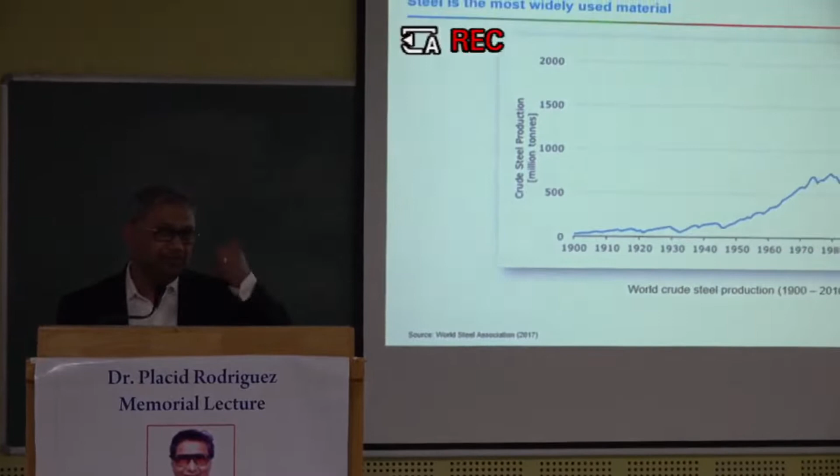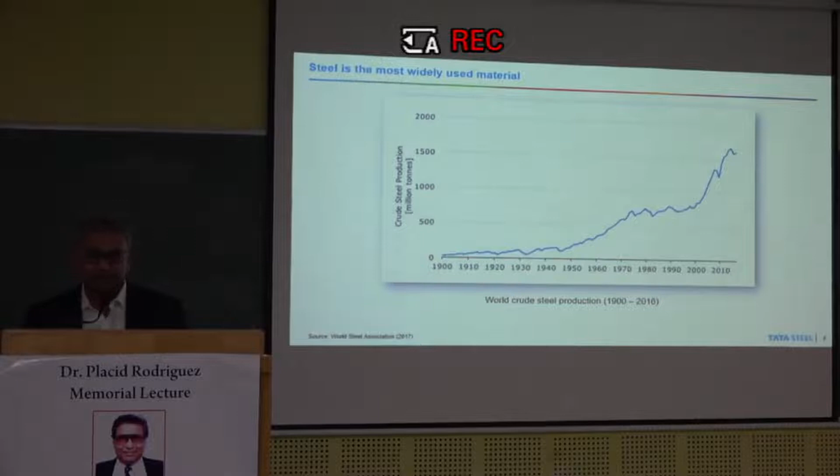Material-wise, steel is not going to go away. The world makes about 1.8 billion tons of steel, that's 1,800 million tons. Total value of that steel, roughly, is about $1 trillion, that's $1,000 billion. It's used in almost every aspect of life, from safety pin to the aircraft carrier. Everywhere there is steel - automotive is steel, the train is steel, the bridge is steel, the chair you're sitting on is made of steel tubes, so on and so forth. The nearest competitive material is aluminum. I'm not talking about concrete - yeah, concrete is more than steel, but I'm talking about metallic and non-metallic materials, not aggregates. The nearest competitive material is aluminum, and in terms of value, while steel is $1 trillion, aluminum is about $200 billion. So that's the gap, right?

The nearest competitor coming up very fast is polymeric and polymeric-based structural materials, which are fiber-reinforced polymer composites. This could be glass fiber reinforced, carbon fiber reinforced, aramid, basalt, or even natural fiber reinforced. But 65% is glass fiber reinforced around the world, and that's about $100 billion. So you have $1 trillion steel, about $200 billion aluminum, and about $100 billion for the nearest competitor, FRP composites. Titanium's global market is about $15-20 billion. So that's the scale we are talking about.

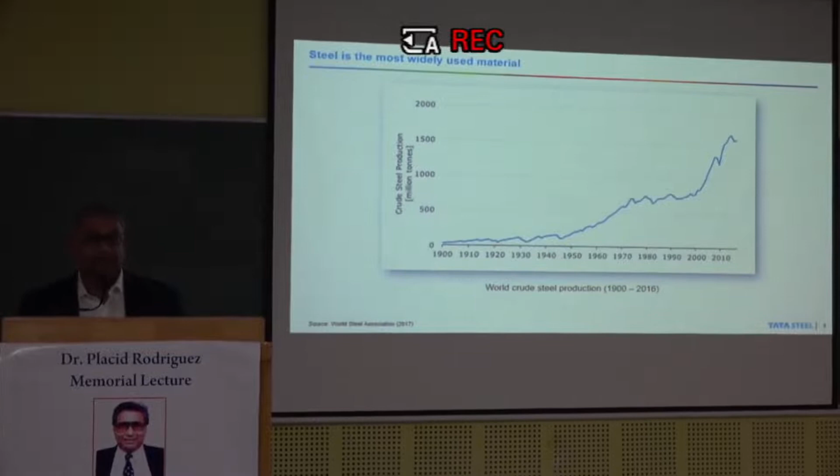None of these materials is actually going to be a threat to the volume and expanse of steel. It's increasing, and it's going to increase as countries expand in their infrastructure. India is a country which is massively increasing its infrastructure. India today produces the second highest tonnage of steel in the world. China produces 600, 700 million tons.

India produces and consumes about 110 million tons of steel, and it is number 2. But if you look at how much India can consume, given by global standard of a mature country, consumes about 250 kilograms per person per year of steel, which for a 1.4 billion, 1.3 billion population, it comes out to about 350 million tons. So India eventually is going to go to 350 million tons. Whether it is going to be 2030, 2040, that's a matter of debate, question, and how future unfolds. But that's the amount of steel eventually, as a mature country, India would need continuously.

Today, India is at 110. It's going to go to 300 eventually. It's going to pass through 200, 250. Those are large numbers. So whatever steel India produces today is going to double, is going to triple.

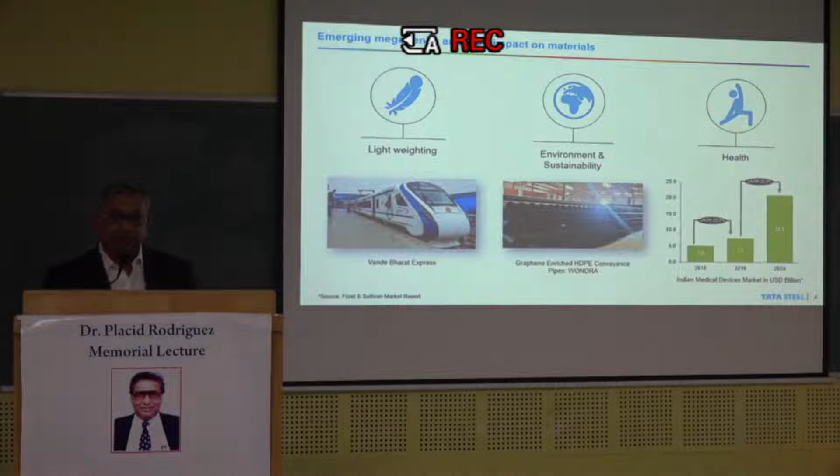And this is usually driven by megatrends. There are many trends that are happening in the world which define the way we behave, define the way industry behaves, and define the way the politicians bring in regulations. And these are megatrends such as lightweighting. The world needs lightweighting because weight means more energy consumption, and if you're consuming oil, you're also giving out more CO2. So the world is going to go towards lower weight, lightweighting, and it's going to always try to use lighter materials.

And those of you who know steel, they know that the move of steel towards higher and higher strengths and higher ductility is driven by the fact that you need to use lighter weight steels in a car, right? But then eventually, when it comes to cost effectiveness, some other lighter material will come in and win the competition. Plastics and fiber reinforced composites are 1/3 the density of steel. At some point, they will win on the lightweighting game. And therefore, bumpers today are FRP or plastic.

Environment and sustainability. It's a one-way street. The world, in spite of Germany suddenly liking coal because Russia has switched off the gas lines, is a temporary affair. The world will go towards low carbon energies. The world will go towards low CO2 emission. And that is a mega trend which will drive many, many behaviors and many, many transitions in the industry.

And you're already seeing battery-powered vehicles, electric vehicles on the roads. It's a one-way street for vehicles, which is to go towards electric vehicles. Of course, the electric vehicles need the batteries to be charged, and that battery is charged today by electricity which is generated by a coal-based power plant. So there is CO2 at some point in the power. But nevertheless, in 5, 10, 15 years' time, that power is also going to be green, and eventually you will have green electric vehicles on the road. That is the mega trend going forward.

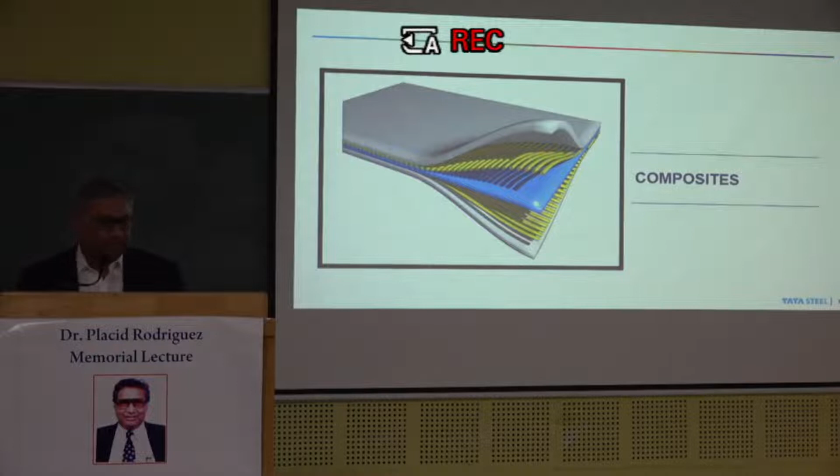But then the competition is based on multiple factors. It's based on whether lightweightedness is important, or superior strength to weight ratio is important, whether chemical and corrosion resistance is important, and whether it's important to mold the material into complicated shapes very easily. And of course, the underlying factor is cost, right? And all that happening at the right cost.

Worldwide, the growth rate of composites, given all these factors, is in double figures. In India, the worldwide market, as I've said, is about $100 billion. India is small. Like in any material, to start with, India remains small. Even today in steel, India is second in the world in volume. It is 100 million tons out of 1,800 million tons, so fraction-wise, it is small. So not surprising that in these new materials, India is small as a percentage of the world. So out of the $100 billion market in the world, the composites market in India is roughly 1.5 to $2 billion, so 1%, 2% of the world.

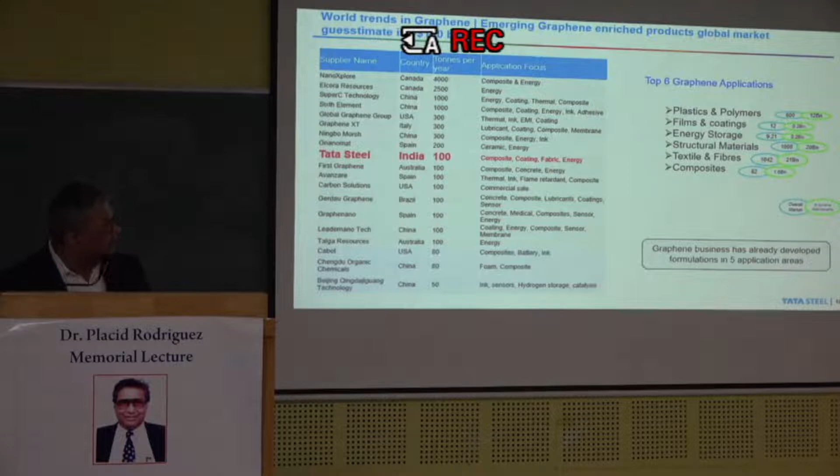Today, in terms of pure graphene production, Tata Steel is among the top 10 in the world. We have a 100 tons per annum graphene production plant in Jamshedpur, using 2 of our technologies, which I can talk about later in more detail if you want. We are looking at application of these graphenes in polymers, coatings, energy storage, textile, and composites.

So we have this plant in Jamshedpur with a capacity of 100 tons per annum, called Graphene—a very obvious name. Today we use graphene, and we have about 50 patents around graphene and its applications.

We use graphene in dispersions in paints, adhesives, and waterproofing. We use graphene in thermoplastics, and we have a range of thermoplastic pipes under the brand Wondra, whose properties are enhanced through graphene—the pressure they can take, and importantly, increased strength level. When you recycle this, normally strength drops, but because of the increased strength level, it can take 3 to 4 recyclings before strength drops below the acceptable limit. So graphene in thermoplastic pipes makes thermoplastic pipes recyclable.

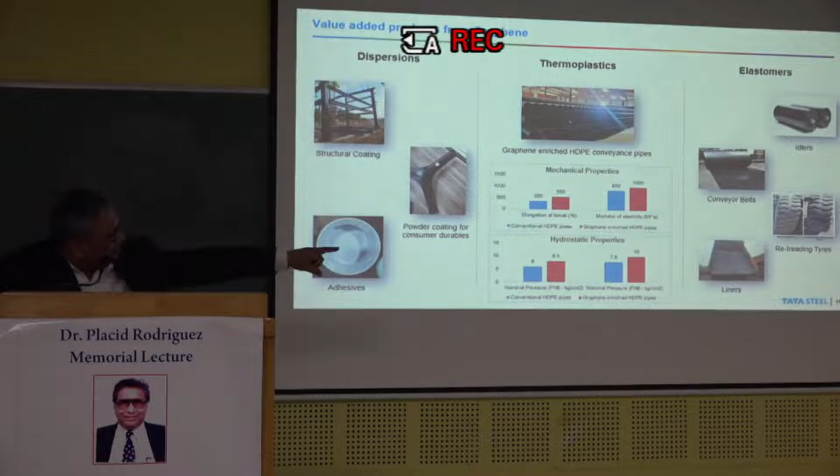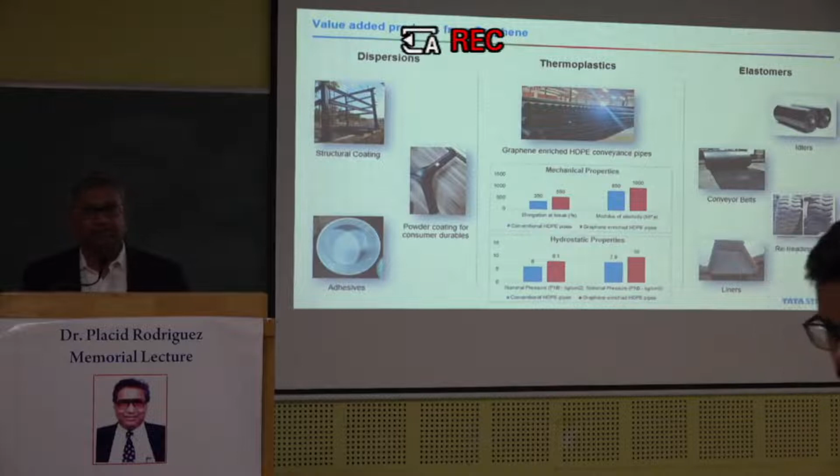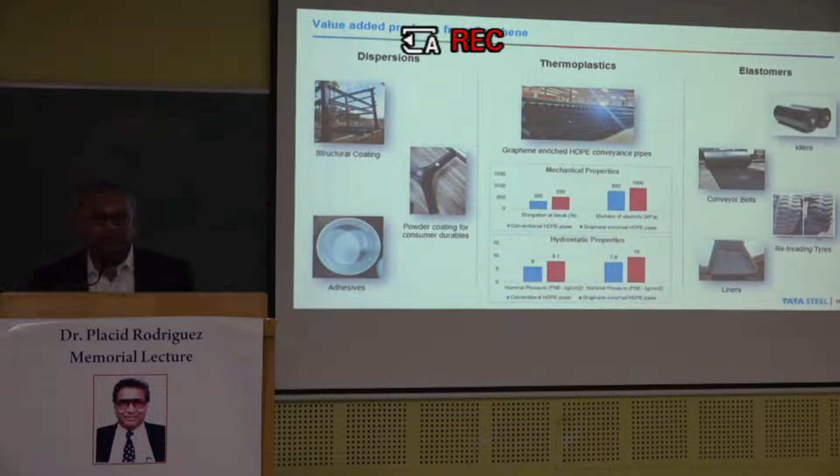Graphene-enriched HDPE conveyance pipes, and you can see the retreaded tires and the liners—this is a liner for a dumper truck. The dumper truck body is steel, and if left as steel, it wears off fast because rocks or iron ore fall on it. But if you put a rubber lining with graphene in it, wear resistance goes up. Instead of changing the main steel body, after a couple of years you only need to change the rubber liner. Without graphene, the rubber liner doesn't last, but with graphene it lasts. So maintenance time comes down, cost comes down, and availability and productivity go up.

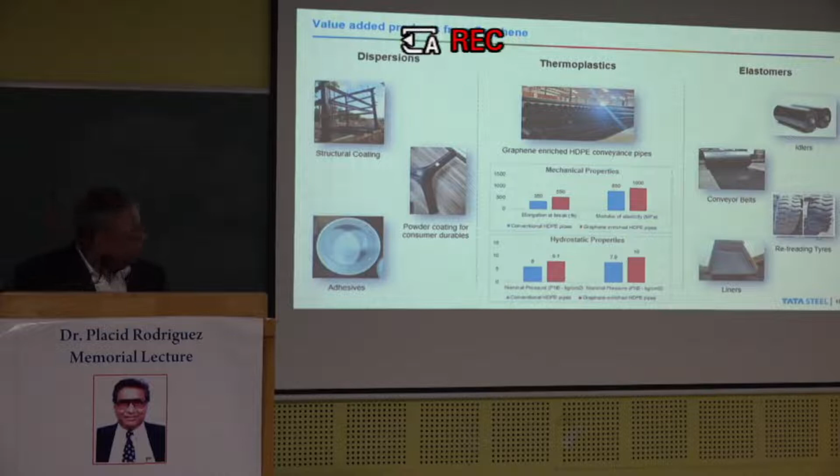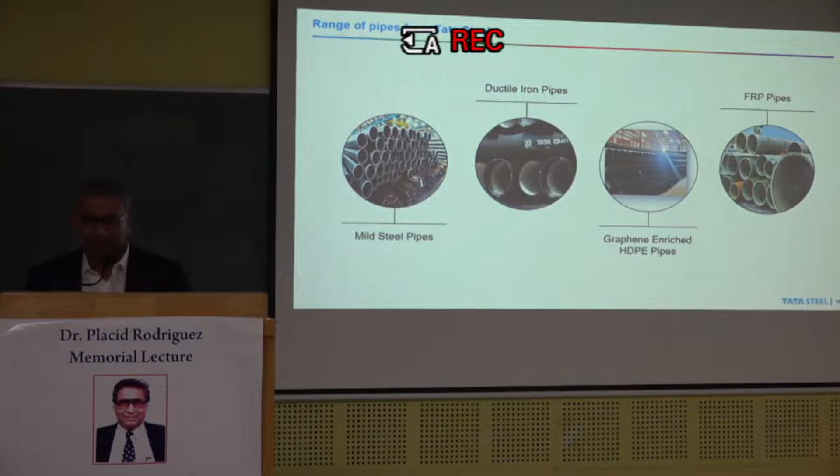Before coming to medical materials, we are one of the top 10 in volume capacity of graphene production. Our graphene business is 75 crores per month, putting us in the top 2 in the world in commercial use of graphene. This puts India right at the top in graphene production and usage, a material that around the world people find very difficult to use. Our graphene commercial usage is on an upward tick, doubling every 6 months.

Looking at the mega trends, we addressed lightweight materials and composites, and we're looking at large evolving sectors such as railways, including railway wagons. Wagons that carry salt and coal actually carry acid, hydrochloric or sulfuric, and they corrode very fast. By specification, these wagons should be made of austenitic stainless steel, but that's expensive, not easily available, and not very easily maintainable. So we've given a solution of using FRP for these wagons. We are working with RDSO, the Research Designs and Standards Organisation, with the permission of the minister, on 2 rakes, that's 120 wagons of FRP material as a prototype for transporting salt and coal.

Going by the megatrends, I mentioned health. As a materials company interested in materials beyond steel, we could not ignore health, so we delved into medical materials. Of course, medical materials is a huge area. Roughly, you could consider medical materials and devices into 4 segments: diagnostic imaging, like X-rays and CT scanners and the materials involved; instruments and appliances, mostly stainless steel; patient aids and implants, which are metallic as well as ceramic; and consumables and others, which are again ceramics and also some textile, bandages, protein supplements and things like that.

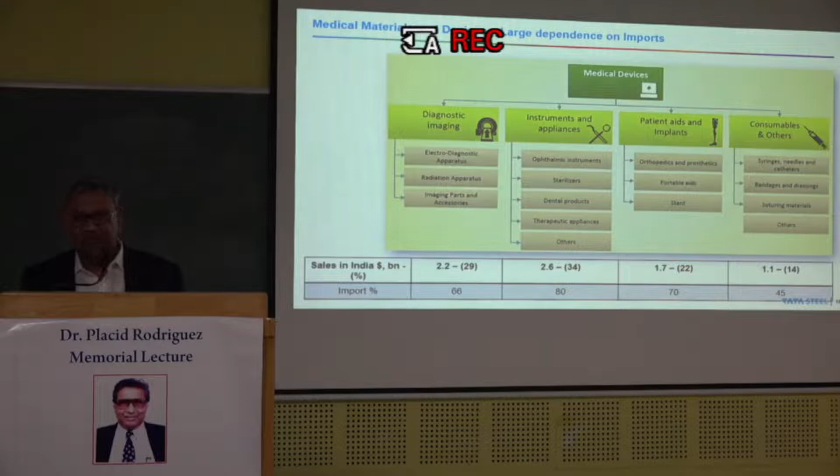So we decided to make a difference. We decided that we will not import even the technology for hydroxyapatite. We decided to work with IISc Bangalore, Professor Bikramjit Basu, one of the leading biomaterials professors, with Ramaiah Medical College in Bangalore, and with a startup company proficient in advanced ceramics manufacturing. We are steel makers; we understand ceramics, but we're not advanced ceramics manufacturers. So we created a company called Ceramat, a Tata Steel company, run by advanced ceramics experts. We are producing at commercial scale hydroxyapatite made using technology from IISc Bangalore. Its quality is the best in the world. We have benchmarked it in India with imported products, and sent our products to Belgium and the US for benchmarking, and it matches perfectly.

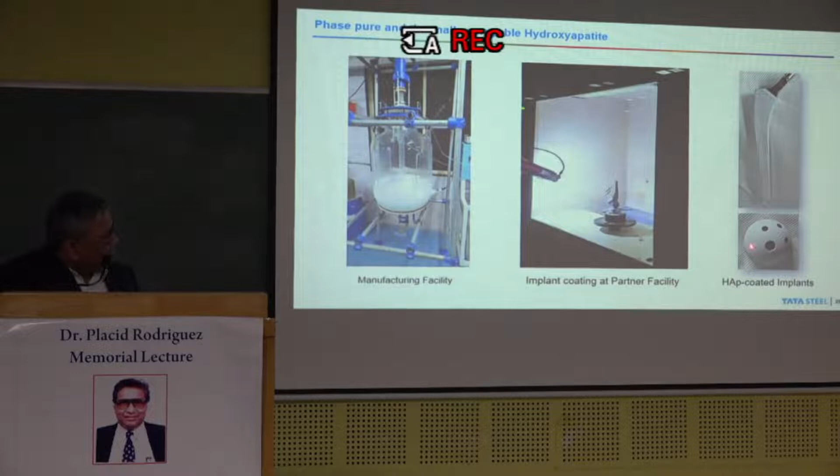Of course, it's gone through a lot of pain and hardship in evolving not only the process but also the equipment necessary to produce at that quality. But today we are ready to market, and it is being test marketed as hydroxyapatite for coating on implants. This is hydroxyapatite being produced in all glass vessels. We make about 200 kilograms per month, and we have the capacity. Here the hydroxyapatite is being plasma sprayed on a hip implant. This is what the implant otherwise looks like, and this is hydroxyapatite coated; it will also be coated on the socket, etc. This is our first use of hydroxyapatite, and the use of hydroxyapatite is multifold. We are 6 months into this business and will grow it rapidly as we go forward. This is an example of where India needs an Indian player to come in with our own technology to claim what is ours, since most foreign multinationals play in our market with prices that they control.

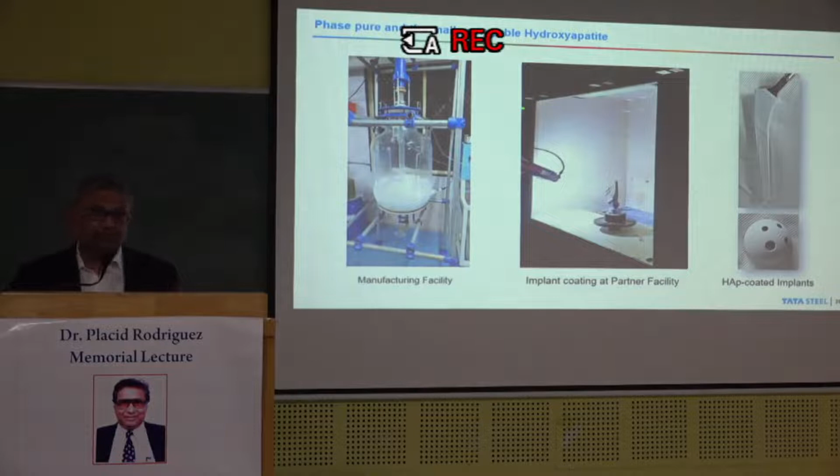So this is a bone replacement. We thought, why limit ourselves to a bone replacement? Oh sorry, there's a video of the plasma coating here.

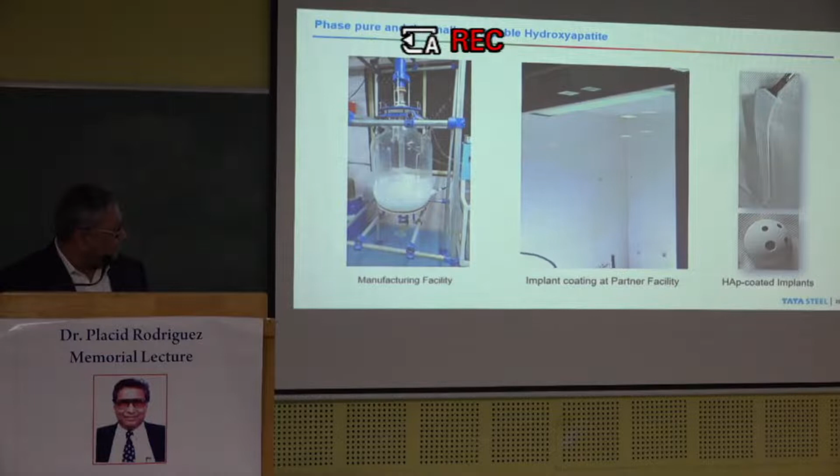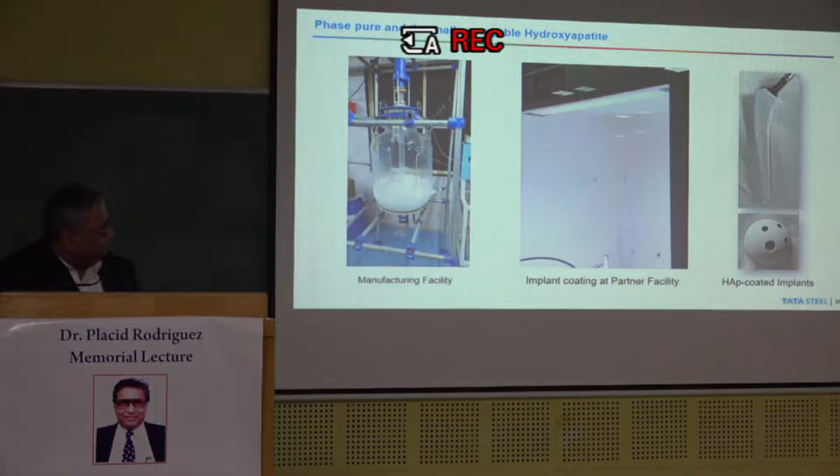Not very well photographed, but I guess you get the point. There's a spray gun, and the implant is rotating for the coating. Can I move on? Yeah.

So we looked at the other material to work simultaneously on. That was a bone replacement, and this is a skin replacement, or even a flesh replacement. So this is a protein called collagen. Collagen usually comes from cow bone or pig bone, which is not very user-friendly in a country like ours.

So the technology that we are working with, along with the startup that came out of IIT Kharagpur, is fish scale-based, which is much more user-friendly than the other two sources.

This collagen can be used, as you know, in deep trauma, deep burn trauma, where you cannot put bandage on the body because skin grows into the bandage, and then when you take the bandage off, it peels off the skin. Collagen, being protein, is assimilated, so it acts as a guard, it also acts as a medication source, and it's assimilated in the body.

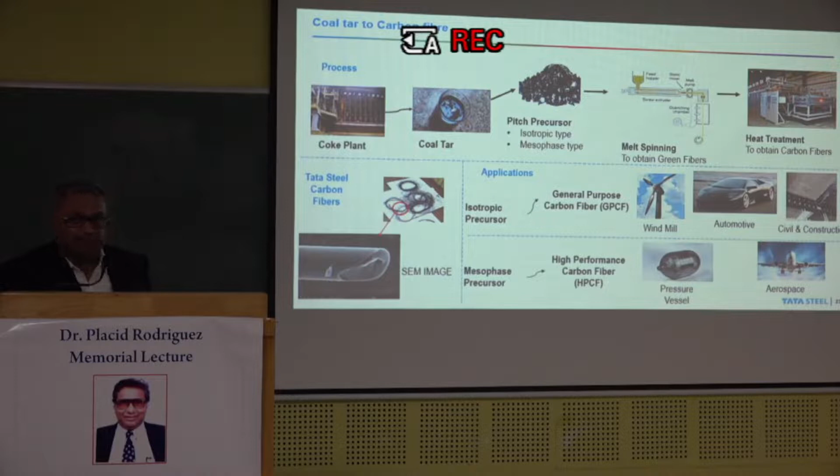The other, and this is my last set of slides, is battery materials or energy materials. So in India today, talking about automotive, we use only essentially one energy material, which is petroleum. And it largely depends on imported petroleum. Petroleum cannot be reused. You use petroleum, it becomes CO2.

Going into the future, with electric vehicles, you'll be using different materials. You'll be using lithium, nickel, cobalt, electrolytic or gamma MnO2. None of these materials are produced in India. They're all imported. So you'll be replacing one energy material, petroleum, with a whole set of imported energy materials.

But luckily, these energy materials are recyclable. So there is a strategic need for India to develop high-level recycling technologies in battery materials to reduce its dependence on import. The more you depend on import, you're also dependent on global politics and pushes and pulls.

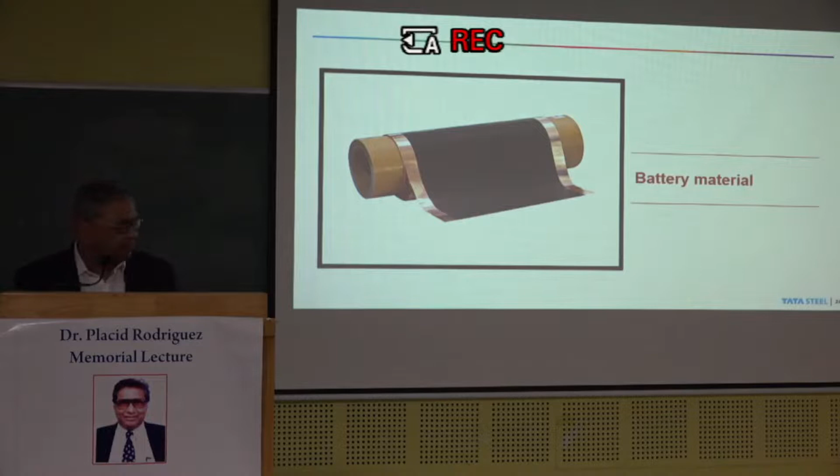There's also a need for generating these materials from non-conventional sources, because India does not have conventional sources of these materials. There are low-grade sources for these materials, and we can develop technologies for generating them. As an example, there are low-grade sources for nickel and cobalt in the mine overburden, so beneficiation technology is needed.

Gamma manganese oxide, or manganese sulfate, or even electrolytic grade manganese for battery cathode applications can come from low-grade manganese ores, and India has lots of manganese ores. We are currently working together with CECRI in Trichy and other institutes to produce at commercial levels. Today we are at a pilot level of producing gamma MnO2 from low-grade manganese ores available in Orissa, and manganese sulfate. These trials are happening as we speak.

Coal tar, which is a byproduct, produces pitch, and that pitch can produce carbon fiber. That pitch can also produce needle coke, soft carbon, and hard carbon, which go into anode materials for electric vehicle batteries. Our aim is to produce these materials at a scale where in 6 to 7 months' time, we have enough batteries to drive at least one scooter, a two-wheeler, as a demonstration that this technology works, which is a completely homegrown technology with raw material available in India.